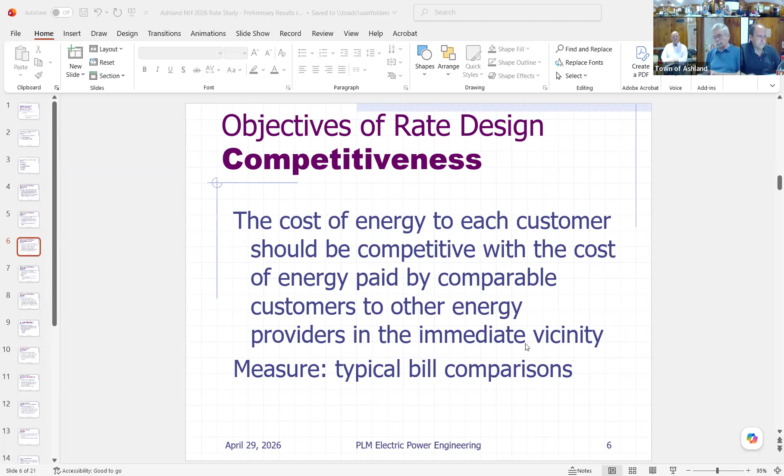We also want your rates to be stable. You don't want them to fluctuate excessively from month to month or year to year. Customers notice that. If you have a rate that goes up and down every month, the customer doesn't see it go down, customer sees it go up. So you want it to be steady and predictable. And so we look at the month to month changes and also design the rate so that it doesn't have to change over time. Ideally, you'd love to be able to put a rate in place and set it for 5 years if your costs allow you to do that.

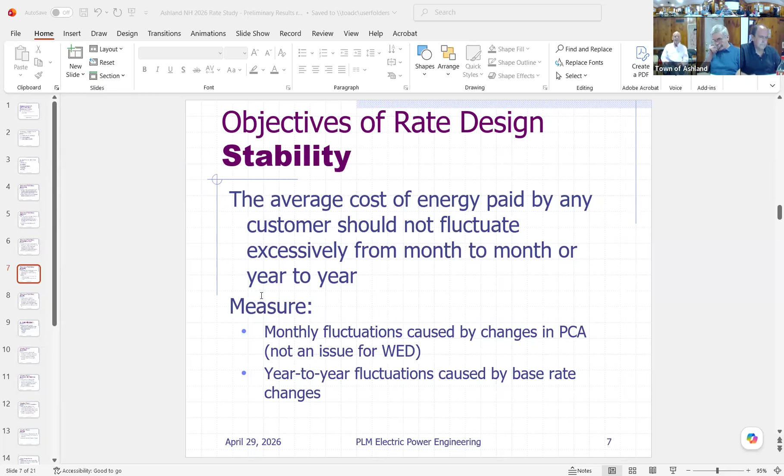And finally, you want clarity. You want the rate and components to be easily understood by the customer. And you'd like the customer to be able to actually calculate the bill on their own without having to use a computer. So clarity is one of those things that you know when you see it. You look at an Eversource bill, you're not seeing it. You look at an Ashland bill, you've got a nice clear bill. Customers know what they're getting.

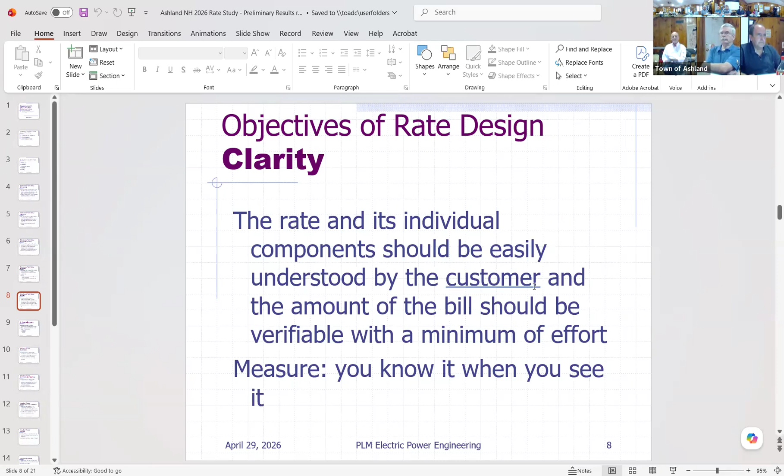So I'm going to talk a little bit about cost allocation. The cost allocation process is basically assigning your revenue requirements, your expenses to each customer class on the basis of how they contribute to your incurring that expense. And to do that, we divide the expenses, classify them into 3 general classes of expenses. There's customer related costs, there's demand related costs, and then there are energy related costs. I'll talk about each of those individually.

Customer expenses are costs that are related just to the number of customers, not the amount of energy that those customers use. So those are your metering and billing expenses, your customer accounting expenses, and the cost of the meters, services, everything that is dedicated, all your plant and equipment that's dedicated to serving one particular customer.

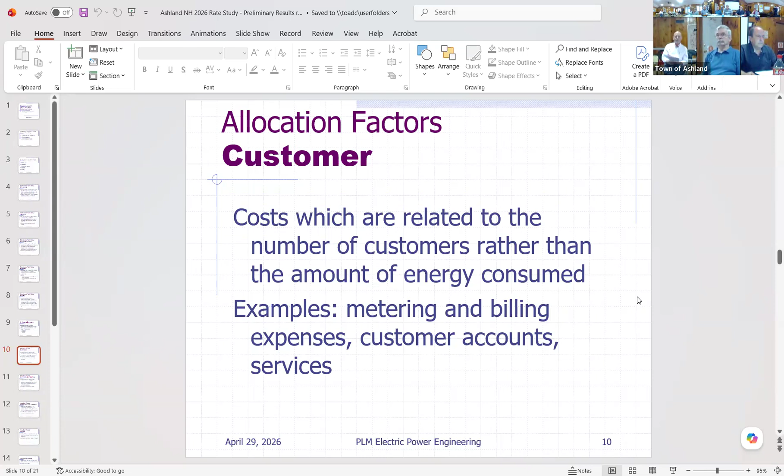Demand is a cost that's related to the maximum rate that the customer is using energy. And that's because the facilities that you build to serve your customers have to be sized to supply that maximum demand, regardless of when it occurs. If you have a large customer at the end of a long feeder and they have a peak at 11 o'clock at night, you still need to supply that peak, and you're going to size the service, the feeders and the transformers to meet that maximum demand.

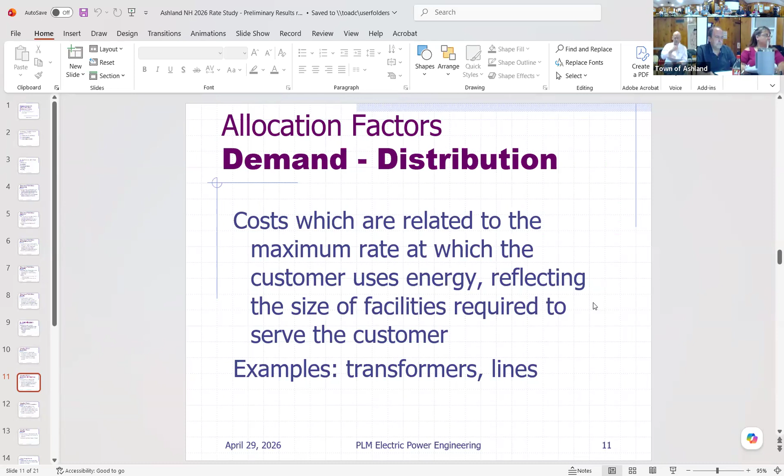So for a large customer in particular, you want to know what that maximum demand is, which is why you bill those customers a demand charge each month. And that's a way of directly attributing those costs to a customer.

Also on the demand side, on your purchased power, you pay a lot for capacity and you pay even more for transmission. And you're billed for those 2 things on the basis of what your system demand is during that hour each month when the peak demand occurs on the Eversource transmission system. So you want to try to measure how much each customer is contributing to that monthly peak demand, because then you're sure that you're going to recover those transmission costs from each customer.

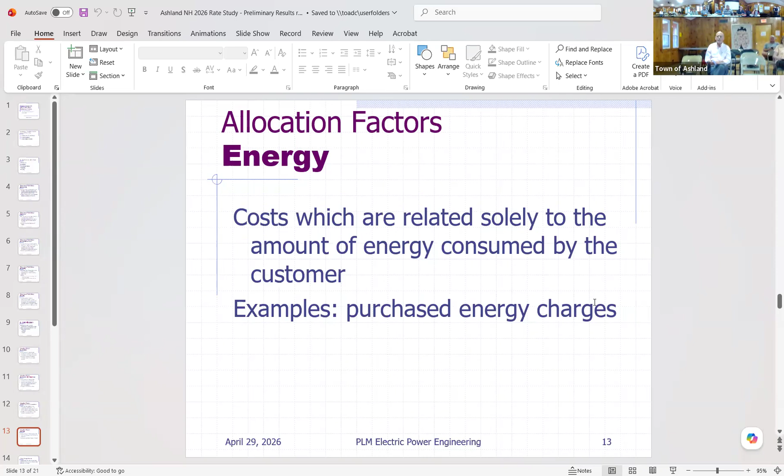And finally, there's energy costs, and some of the energy costs do vary somewhat by time, and we try to take that into account. On-peak energy that you purchase is more expensive than off-peak energy. And about half of your total bill is the energy cost that you pay to your supplier. So that's another important thing that you have to take into account when you're designing rates.

So, basically what you do is you try to add up all the costs of serving your residential customers, for instance, and divide that by the number of kilowatt hours that you're selling those residential customers. And that's what you need to be at a minimum recovering from that group of customers.

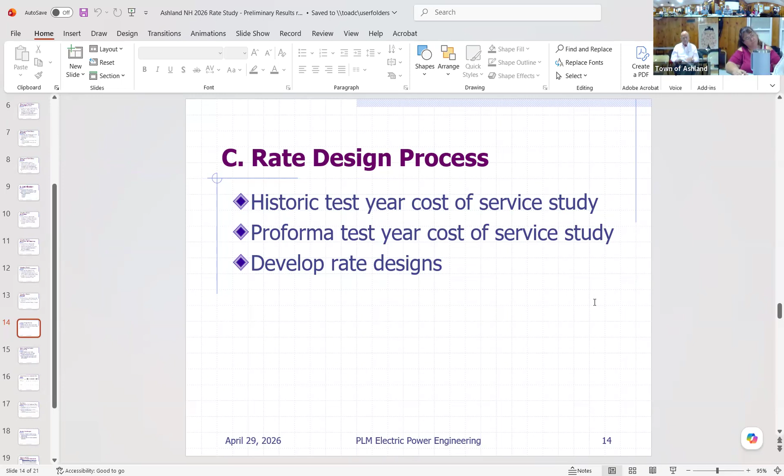To begin with, we start by looking at what we call a historic test year cost of service study. And we then look at a pro forma future test year cost of service study, and that's what you design the rates around, and then you develop those rates. In the historic test year cost of service, we take a full year's historic data. Here we had the luxury of 2 years of historic data, 2024, 2025.

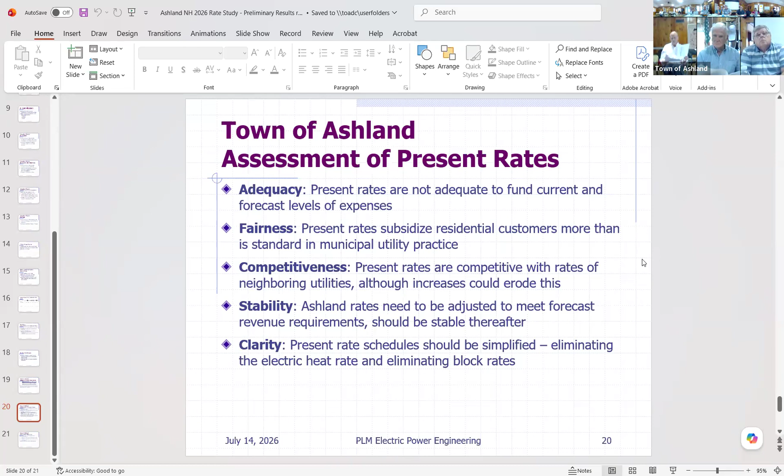So when we look forward, we're gonna have to look at what the budgeted power cost is for the rest of this year or next year, and then the rest of your budgeted expenses. And where does that leave you in terms of needing enough revenue to meet your objectives? So the objectives that we've talked about with the town are to increase the net income to about 215,000, the target that we're talking about getting to. We also have some ideas that I would recommend to simplify the rate structure.

Most of your rates have a number of different block rates that tend to decrease with higher usage. They're not justified by economics because it doesn't cost you less to provide more energy. Doesn't really cost you more, but it's better to have that just be flat. You can go to time of use because on-peak energy is more expensive than off-peak, but that's a really difficult thing to implement. You've got metering and billing problems in doing that, and it's probably not worth the effort.

The electric heat rate, that's another rate structure that's sort of antique. I've been eliminating electric heating rates in municipal utilities that I've worked for the last 30 years. They've been hanging around, and it's a little tricky to do. Luckily, yours is not a huge discount for the large use of electricity. So eliminating that block isn't going to be much of an impact on the customers, and it'll help simplify your billing process. You'll only have a single rate, and it'll be all one cost.

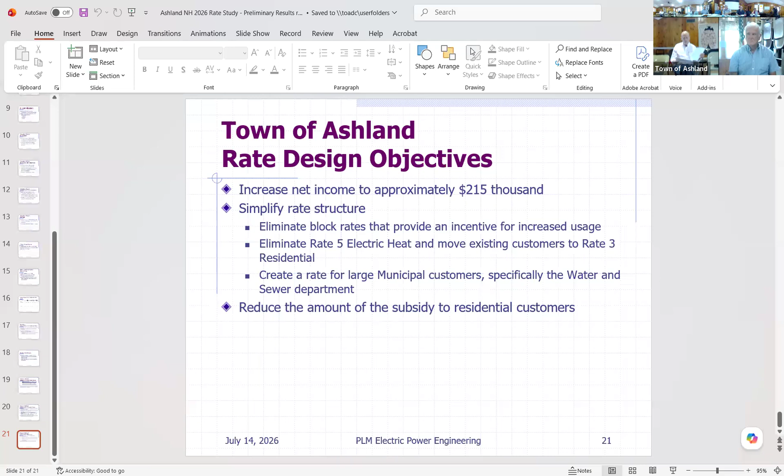And then finally, of course, as we already talked about, reduce, and maybe that can be done over a period of time, over a number of years, reduce that amount of the subsidy to the residential side. So those are the rate design objectives that we talked about. And that's the end of my direct presentation. I'm happy to answer questions that anyone might have.

I got a couple of questions. So right now, the water and sewer department charges go into which rate structure? I believe all of those customers are on the general service three-phase rate. Okay. There's a demand charge on that. Really large customers are on that.

And so you're recommending an increase in net income to $215,000. And right now, this past year, we made $95,000. So basically, we've got to make up at whatever time we can do that, $300,000. That's right. And of that $300,000, if capital improvements were not part of the previous year, that would be additional costs that we would have to build in. Is that accurate?

Well, the capital improvements are, I mean, you fund those out of your reserve, or you fund them with debt. So, wouldn't you, just a question, wouldn't you want to try to build in some amount that if you know you're gonna have to spend, name a number, $1 million, for something in 10 years, wouldn't you want to start saving for that and build that into the structure?